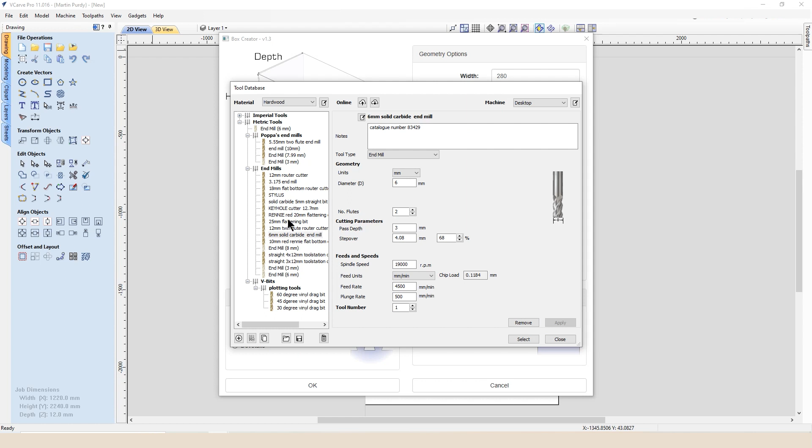So over here, you can see that there's faces to be machined. You can select and deselect all of these different faces, okay? And we're going to choose a tool. For this particular operation, we are going to choose the 6mm solid carbide end mill.

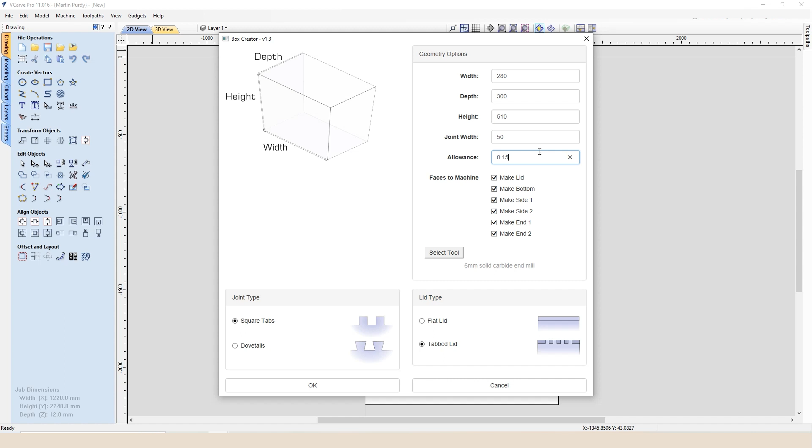So the only other thing to pay particular attention to is this allowances section here. I know from mine in particular, I want a 0.15 allowance, but your machine may differ. Every single machine out there is going to be like a vehicle - you can take two exactly the same vehicles from the same brand, but they may drive slightly differently. So you may want to play with these allowance features to suit your machine and your cutter.

So once you've got all your parts selected, you press OK. Mine I've set to a line here. I can select all of my parts and move them around on the screen, and as you can see, the gadget will pre-make your toolpath. So all my cuts are set outside of my material allowance.

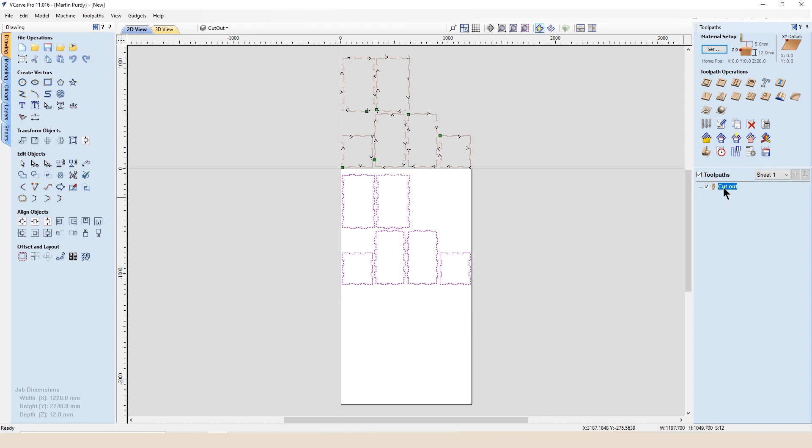So to change this, I just right click, go down to recalculate, and I'm going to ask it to recalculate all toolpaths. So now all my components are snapped to fit inside of my 8x4 sheet.

So there's a couple of things to be aware of with the Box Creator gadget. Firstly, this was made for imperial versus metric, so your thickness for your tabs will always be 0.025, which as 0.025 of an inch isn't necessarily an issue, but 0.025 of a millimeter is going to be tiny. So we're going to change that to 6 millimeters.

And the length of the tabs at 50 millimeters is too big, so we're going to make that down to 15. So we're going to have a 15 by 6 tab, and we'll change that to 3D tabs also.

Now, another thing to be aware of is the ramps section will always default to a 100 millimeter ramp, which is just far too long. So you think even in inches, that's going to give you a 100-inch ramp, which is just ridiculous. So we're going to change that to 10 millimeters. Okay, so they're the only real two things to look out for.

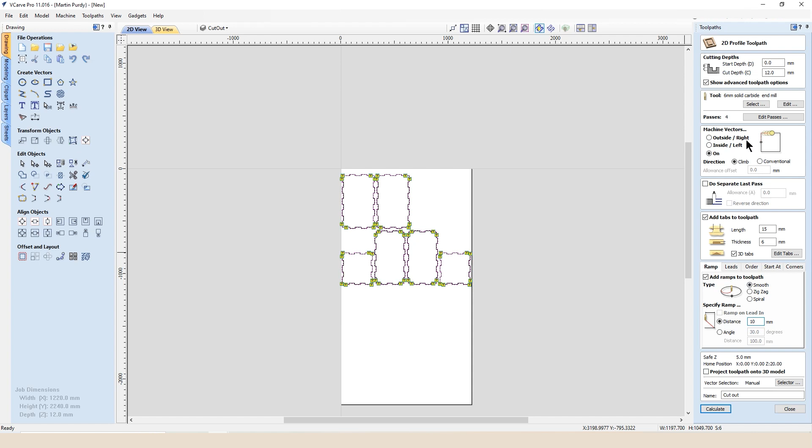So if we recalculate that now, you can see that my tabs are much smaller and my ramps are something more acceptable. So we've made a basic 6-sided box.

So now if we revert back to the file that I've already designed for our flight case, we can talk more in detail about this specific file.

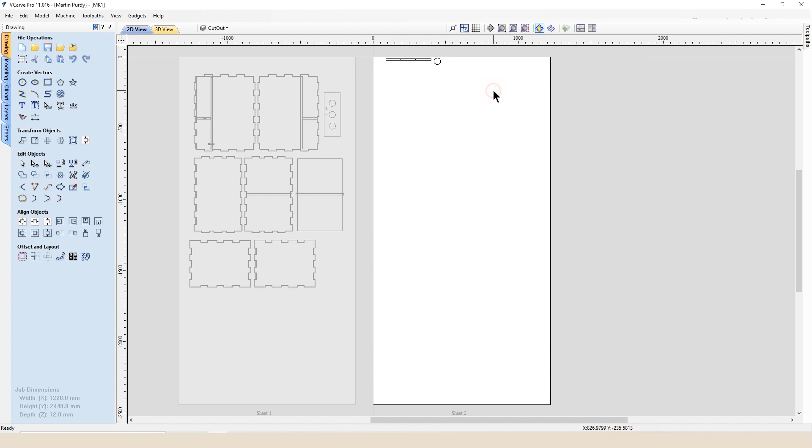So first thing to note is I made some test cuts for my pockets to accept the 12 millimeter rebates, which are detailed over here. Now, this is going to be to accept this portion of the file, which is going to sit into the side of our case and give us an aperture for 2 spindles, a stylus, the collet spanner, and the T-hex spanner.

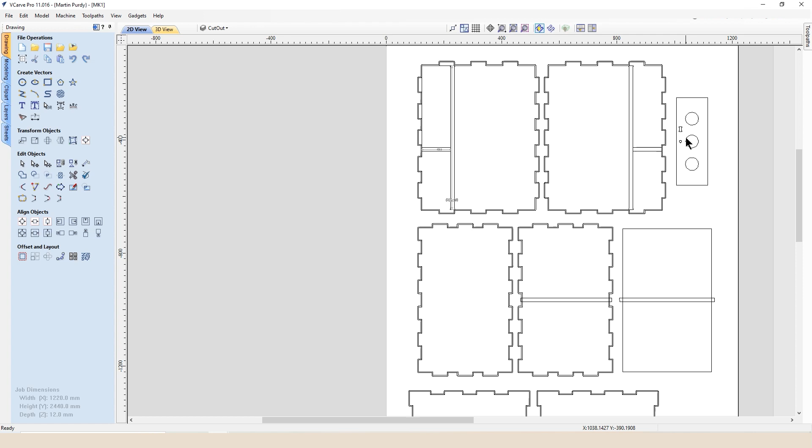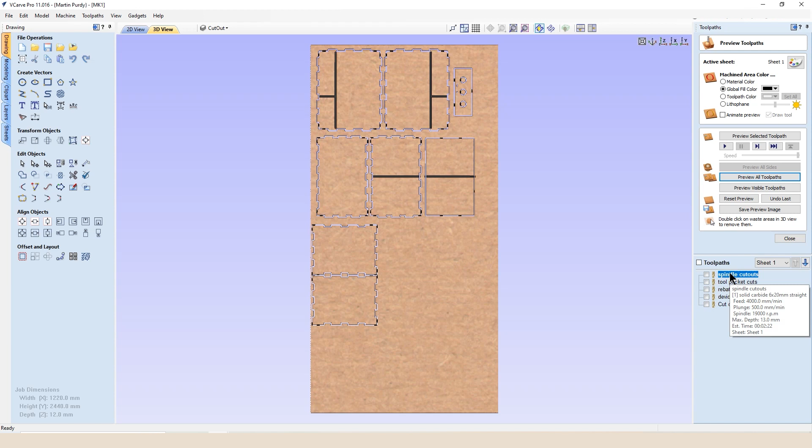Okay, so really simply, I'm going to open this up here and we will open the previews. And as you can see, I've created all the toolpaths to suit a 6 millimeter end mill, and all of the toolpaths have been highlighted and separated here to each operation for you.

Okay, so again, what you can do to reorientate these pieces is you can move them around anywhere on the screen using your arrow keys, or if you double click on there, you can use your cursor to move them anywhere on the screen. Once you have these components where you want, you come over to your toolpaths, right click, recalculate, and you can recalculate a singular toolpath, or it's just easier sometimes to recalculate them all.

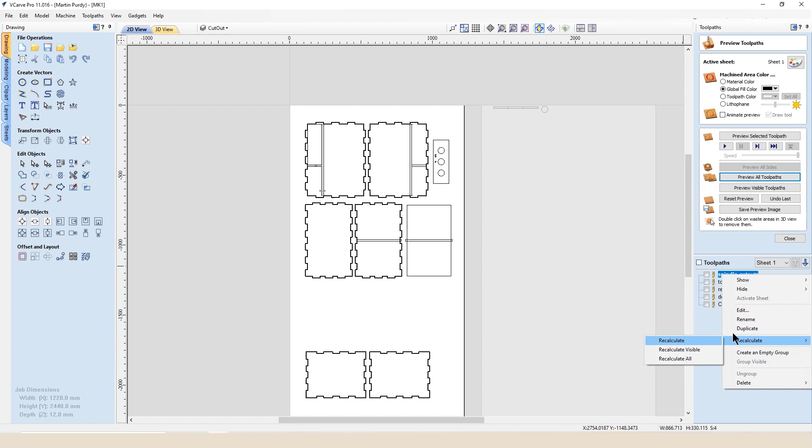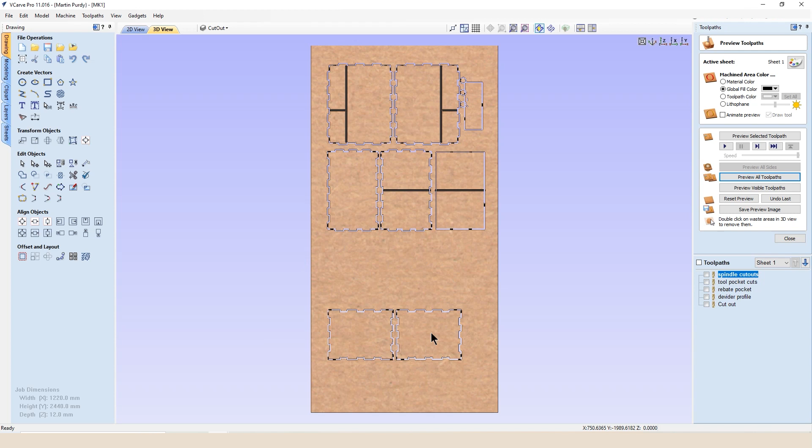So as you can see, when I come back to our preview, I'll reset the preview again, and then we'll run that, and you can see our parts have correctly orientated to our new locations.

Okay, so if you're going to design a box from scratch, a couple of considerations is with the finger tabs, if you are very closely located to the edge of the sheet, you could end up with breakout and singular parts then falling off the edge of your material.

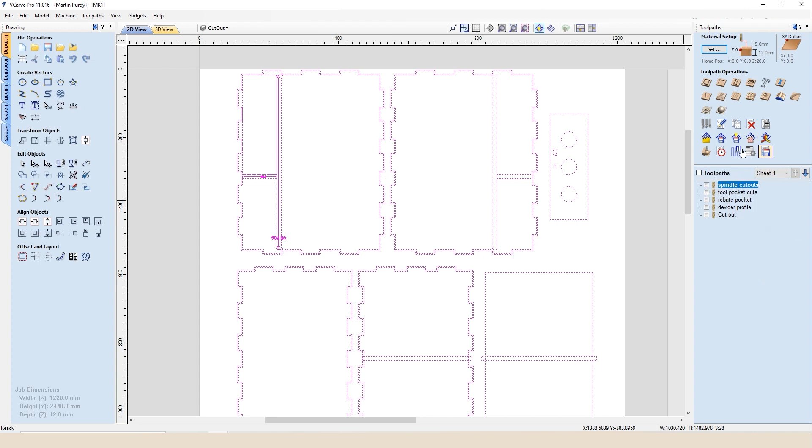Furthermore, any parts between two vectors that don't have correct support will again break out and can come loose in the middle of your project. So it's always worth looking at your toolpath and your tabs, making sure you have correct orientation on your tabs to give each of your components correct support.